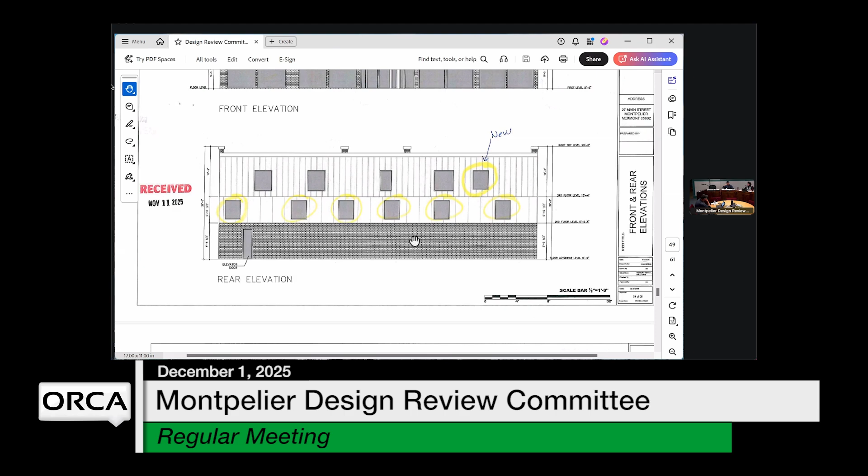On the rear and on the side where the American Legion is, the other two sides are basically staying the same. On the American Legion side, we're only siding above the existing brick, the additional 8x12 block siding. So we're covering that, and the existing brick will stay the same. It's the second floor only that we're residing.

What appears to be some sort of sheet good - exactly, so we're covering all that and that top block. Any of the existing original brick we're keeping. And what are you proposing to side over that with? The plan is to do rigid insulation, 2-inch rigid, and then premium vinyl siding which matches that same beige color. The cut sheet is in the packet. So this rendering that has a sort of standing seam look is not what's going to be happening. No, that's just how the program rendered it. So basically what I'm seeing in these elevations isn't necessarily accurate, like this brickwork is not going to be there. Exactly.

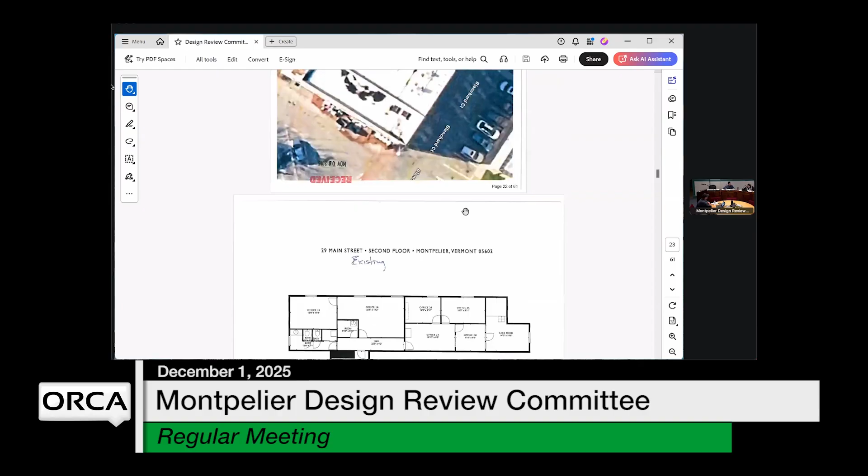Sorry, I was focused on the windows - we'll get to the windows, but I was curious. It did show vertical siding on the sides. Sorry, vertical is a pattern that already exists on the building, so I was reading that rendering as matching these other two sides, but I'm hearing it's going to be different. So is the front vertical going to stay the same? Yeah, the front we're not doing anything. It's just the back and the second floor of the Legion side.

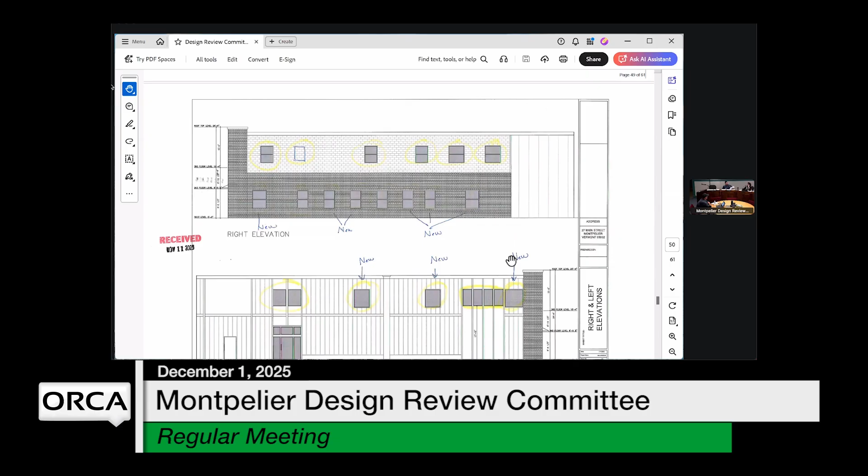So everything, all the other siding stays. Because the plan, I don't know if the generating program just took the design down and moved the same conceptual design up - sorry, I'm probably making Martha and Rebecca kind of dizzy. And so on this rear elevation...

You're showing a brick here - does that exist and you're opening that up? No, it's just all vinyl siding. So I shouldn't read anything into what I'm seeing here. The vertical siding shown was done before the concept of residing was set, correct? Yeah, so as far as siding this means nothing, nothing.

All right, so I'm going to pick out one of these pictures - it's going to show up on the screen in a minute. This is showing the side facing City Hall, so that has the vertical siding right now. Right, the existing - and you're cutting holes for windows but not changing that siding. Exactly. But then this rear here, which right now has the mural, would be horizontal siding, the whole thing. Right, so you'd have the front and this side, the two sides most viewable from the street, stay vertical. And that's because the Legion is actually vinyl sided horizontal, so we were just matching the neighbor.

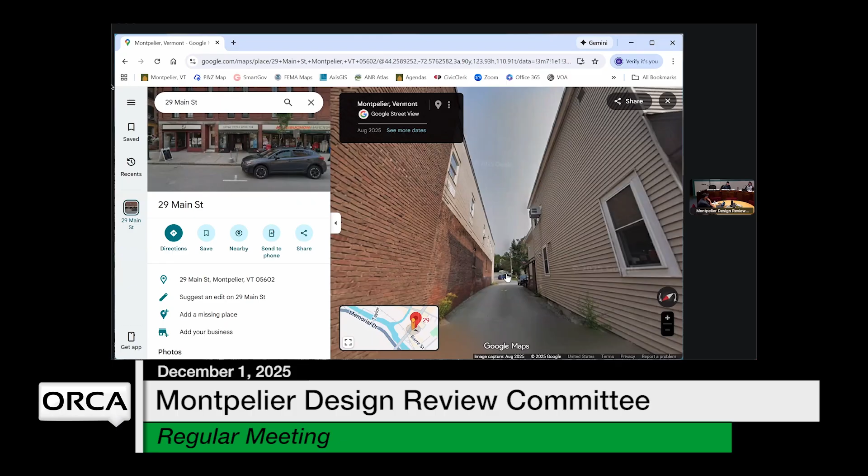And on the Legion side as well, entire side is vinyl? Nope, just the top, where the block is. So currently keeping the siding brick, all the brick will stay. Oh okay, so it's here and then it goes down to the ground way in the back, on that addition where I think that's like the elevator shaft. Exactly, so we're just following that structure line with the vinyl siding, because it doesn't match the brick, doesn't match anything over there anyways.

Is the elevator door in the rear painted into that mural, or are you cutting that in there? On the rear elevation, this elevator door, it's there in the mural, that's what I wondered. Yeah, it's that storefront on the left. Oh I see, it's hidden into the storefront.

Are the paradigm windows, is that fiberglass or vinyl, what is that material? That is a vinyl window, double pane vinyl window.

What's the color of the windows? White. Did you think of doing it in a dark bronze or black? We just kept it white because it would be clean with the beige and everything else we were thinking, but it's all existing white now, so we just kept it the same look.

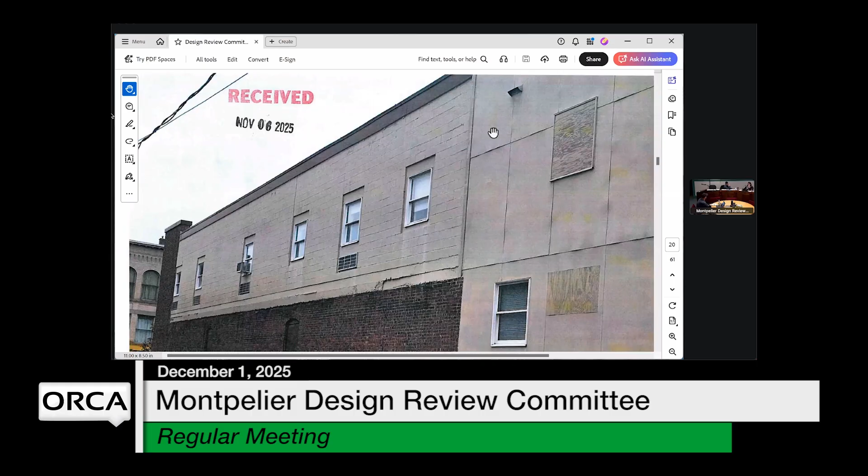Should I be paying attention to the rear elevation? I'm looking at it and seeing the circled windows. So those are getting resized, and the ones that aren't circled are existing in this mural.

Is the idea that these three would be brand new? Yes. Those are the existing ones that aren't getting resized.

It's very fun, yeah. It's hard to read this because it's trippy. This is why I had to have Chelsea come over and we were walking around the building matching it up.

I'm just gonna show on the screen. So this window, this one, and this one are existing and don't need to be resized.

Then there's a new window going in here, and each of these small ones down below on the rear is getting resized. So these lower windows are going to be a bigger version.

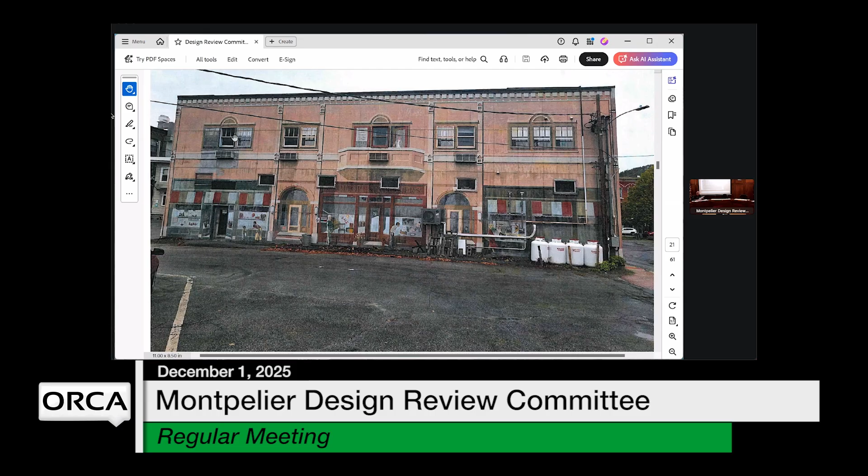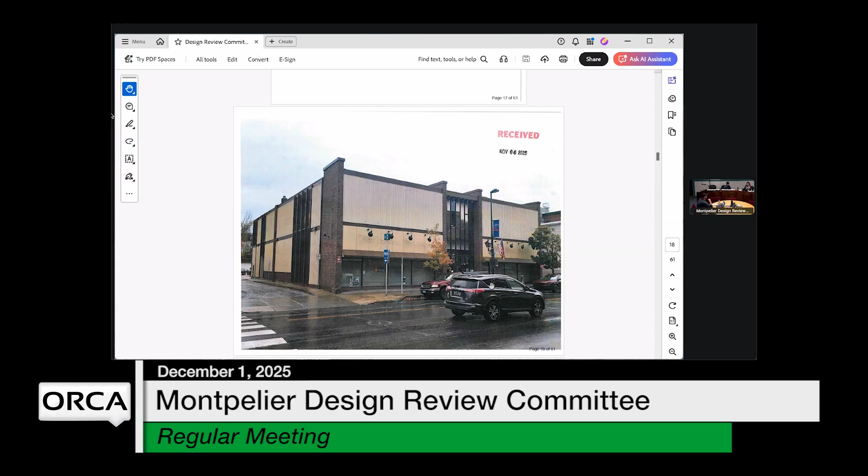Yeah, we're not doing anything with the front. Well, I didn't think so, but I couldn't figure out what - yeah, I think that was an older floor plan situation, must have been a really old one. We've gone back and forth a few times trying to get things consistent and updated, so I didn't know.

Meredith, would you show that again, the back? Oh yeah, of course. Sorry, I was trying to scroll back because it's easier for me to see too - let me pull a different floor plan, but let me go back and show that rear again.

At the top of this mural it looks like they have some sort of a decorative thing. Is that part of the architecture of the building, or is it painted on? That's all painted. It's not real then. No, looks wonderful though.

I know, it looks pretty good. I remember when this was a lot fresher. They did a pretty good optical illusion on the back with the paint job - it is trippy when you look at it and see the painted windows along with the existing windows. It almost makes you double think everything.

Especially hiding the access door within that setback storefront there. That was one that always caught me a little surprised when you saw somebody walking out of the back of the building.

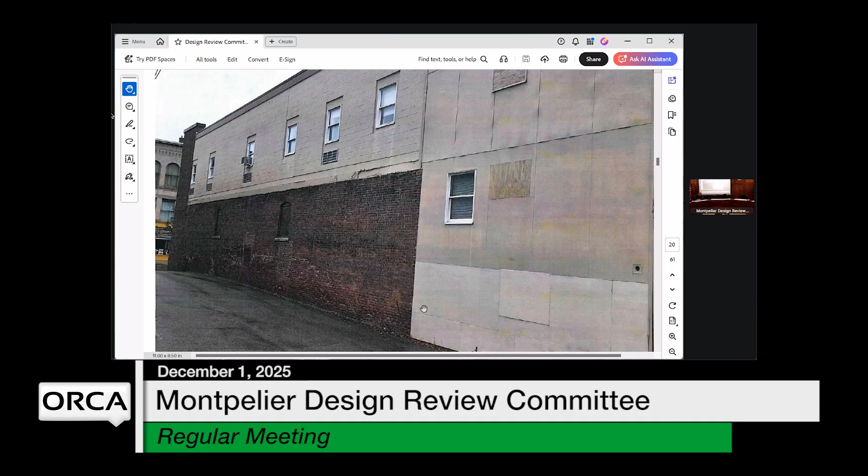Thank you. I too have hesitation about the siding, and I would prefer actually some sort of almost flat sheet of some description.

I hear what you're used to working with, and I deeply appreciate your effort at buying the building and moving forward with it, and that means a lot to me. I don't want to get in the way of that, but I feel sad about the vinyl siding and wish there was another option to think about, as it's a downtown building with a lot of surface area. It's a big, visual project, and I think it's a unique and interesting building that could be more highlighted, but I feel like the vinyl siding doesn't do that.

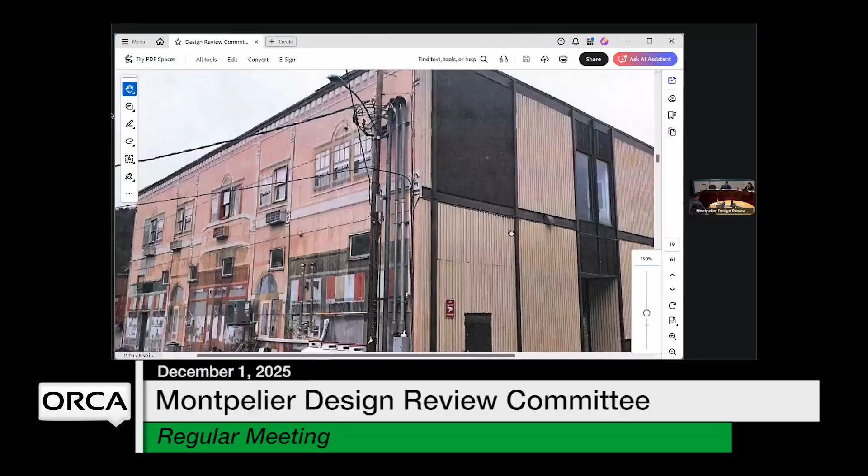I appreciate that. It's just unfortunate that everything has a value, and yes, I hear that, but there's only so much you can do. Those arguments are powerful and I understand them. We actually looked to find that original siding and you can't find it anymore.

That existing siding, we looked to find it. I had Sticks and Stuff, RK Miles, everybody I could think of look, even for that vertical metal - well, it's not metal, it's like a stone concrete type material, can't find it anywhere. That was the original thought, but even if I could find it, the cost would be so astronomical you can't do it. The material is like a masonry stone, or like a Hardie product, a weird material.

Everybody I talked to said that's the only building they've ever seen with it installed. I mean, it is a unique thing. That's why we didn't touch any of it, it's just cool. So the back is the back, but fortunately there's only so much - due to the square footage, everything's such a cost that you can only do so much.

Is there any metal that would duplicate it? I mean, I'm sure you could find something, but you're talking $20,000 to $90,000 - it gets to a point where it's not even practical for a siding. The good thing is it is siding, so it's something that further down the road could theoretically be replaced again.

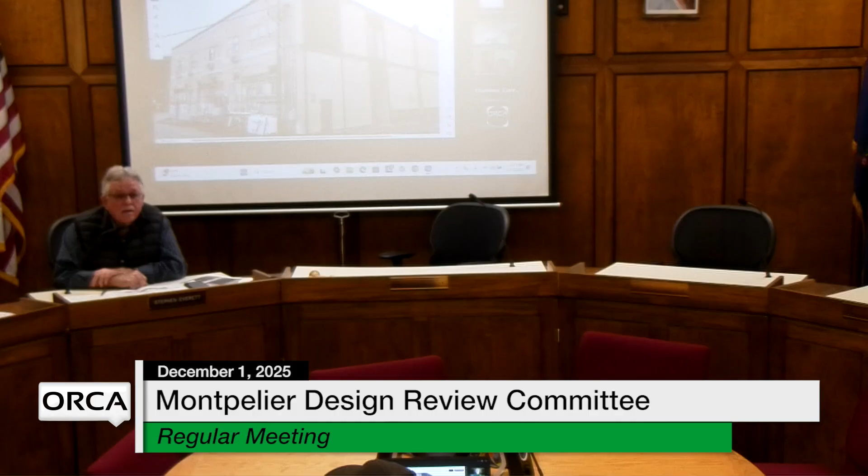But at the end of the day, if you're saying you want to see vertical vinyl siding, sure - pricing is similar. Like I said, our goal is to produce apartments. And it's a noble and very good goal, and I am deeply appreciative of it. So I don't want that to stop a project. Yeah, I hear that.

Would you want to make that a recommendation or not? Something actually happens to these buildings downtown in this way, and I can respect it - it's meaningful. I'm saying if vertical vinyl siding is your recommendation, then so be it. That would be my recommendation, I would stick with that. I deeply appreciate your willingness to consider it, because I am quite torn, since I do appreciate what you're trying to do. Consider it done.

Okay, done. Let us know if that becomes an impossibility. No, it'll happen. Vertical vinyl siding, done, okay. Vertical siding and dark window. There you go - I think it'll be more compatible with the rest of the building. Yeah, I think that'd be really sharp.

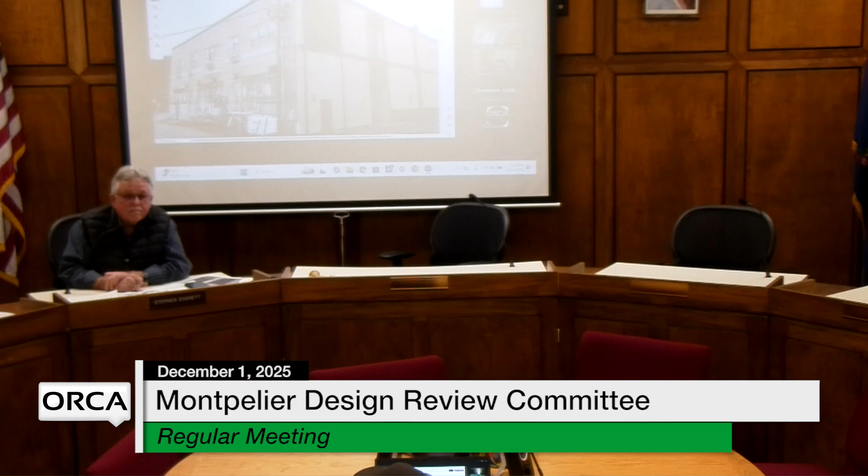Like I said, at the end of the day, my goal is to produce apartments, and that is not enough to stop the project. So I love it. You're practical, and I appreciate that. Yes, thank you, yeah absolutely. I appreciate you guys' time - everybody's time.

Anybody have anything else to add? No, there's a set of criteria, you've probably seen this before, that we have to go through. Yeah, absolutely. And I'll just read down through them.

Exterior design and materials of new construction or alterations of existing buildings shall be consistent and compatible with the characteristics of the existing building or other properties in the district. Additions and alterations to non-historic and non-contributing structures shall respect and be compatible with existing patterns and setbacks found in adjacent buildings. Acceptable. Existing buildings shall be recognized as a physical record of their time, place, and use. Acceptable.

Location and appearance of all utilities, mechanical equipment, trash storage, fencing shall be sited to minimize adverse visual impact, adequately and appropriately screened from public view. Acceptable. Alterations to buildings called for by public safety, accessibility, and fire codes shall be designed to maintain the character of the construction materials and features to the maximum extent feasible. Acceptable.

Proportion: compatibility of relationship between width and height of facades, as well as relationship of width to height of windows and doors. Acceptable. Rhythm: the visual patterns established by the alternation of solid walls and openings, windows and doors in the facade of buildings shall create a rhythm. Acceptable. Roof shape and equipment: rooftop equipment and features on flat roofs from eye level view concealed from adjacent public rights of way and from the ground level of any adjacent properties.